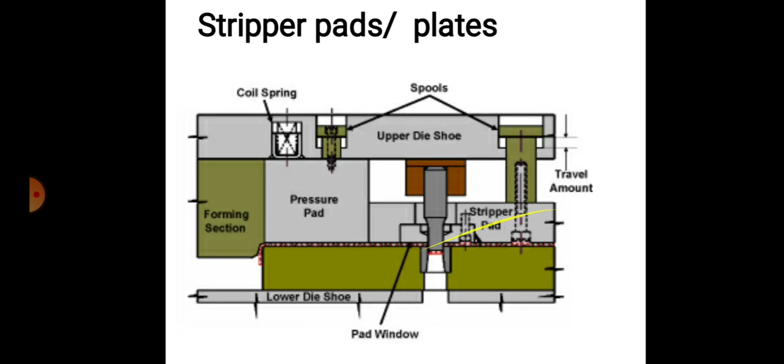This figure shows the pressure pads or pressure plates. Most pressure pads use high pressure coil or gas springs. When loaded with very high pressure springs, contoured or flat pads can also form sheet metal. The pressure pad must apply force that is at least equivalent to the bending force. This is very important - the metal must be held down tightly to the lower die section before the forming punch contacts the metal. So this is the function of pressure pads or plates.

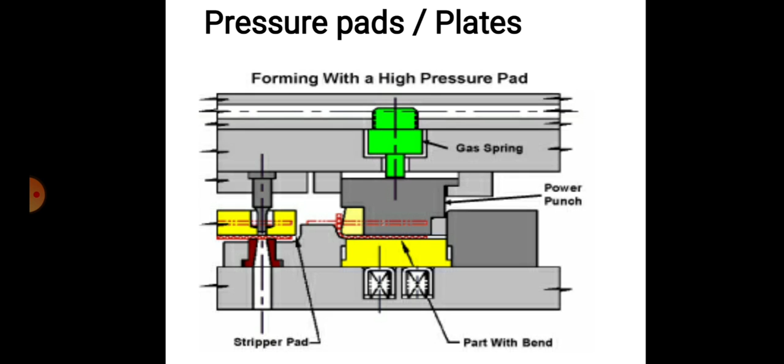Draw pads, often referred to as binders or blank holders, are usually made from hardened tool steel. They can be flat or contoured depending on the piece part shape. Most drawing dies use a single draw pad; however, in special cases, some use two.

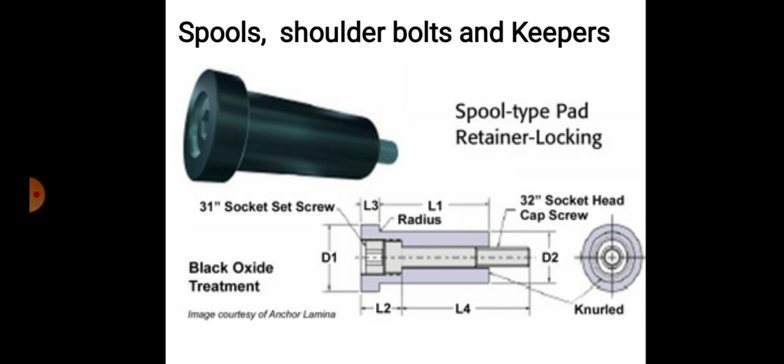So the retainer holds or secures the cutting or forming die component to both upper and lower die shoes. A spring loaded ball bearing locks into the teardrop shape and prevents the punch from coming out of the retainer. This is the mechanism used in all press tools.

The advantage of the ball lock retainer is that it allows the die maintenance technician to remove and reinstall punches quickly. The punch is removed by depressing the spring loaded ball bearing and pulling up on the punch. Specialty retainers can also be made to hold and align irregular punch shapes, as well as headed style punches and pilot pins. This is about retainers.

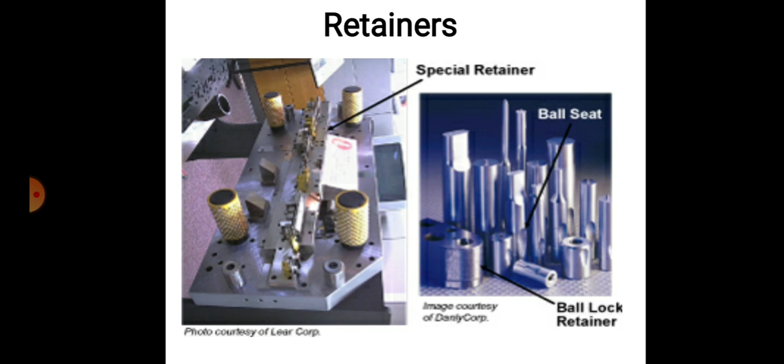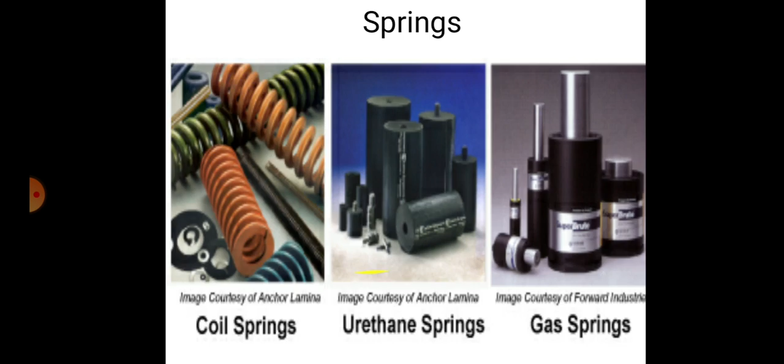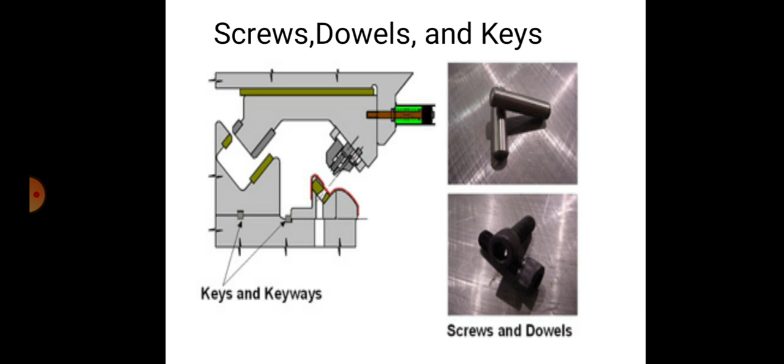These are some important components. Today we discussed springs, retainers, spool or shoulder bolt keepers, draw pads, pressure pads, stripper pads, screw dowels and keys, heel blocks and heel plates, guide pins and bushings, die plates, shoes and die sets. These are some important components which are used in press tool die assembly.

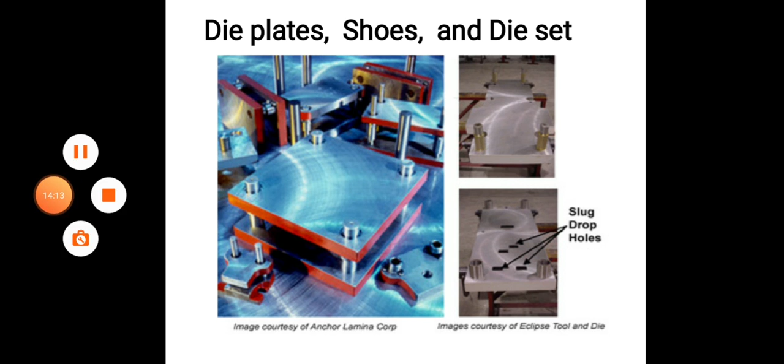We must know the material used, the strength used, the type of construction and type of material, and the conditions. All these are factors we should consider while designing a die, punch and die. This is about the assembly of the components used in press tool die. Thank you very much.